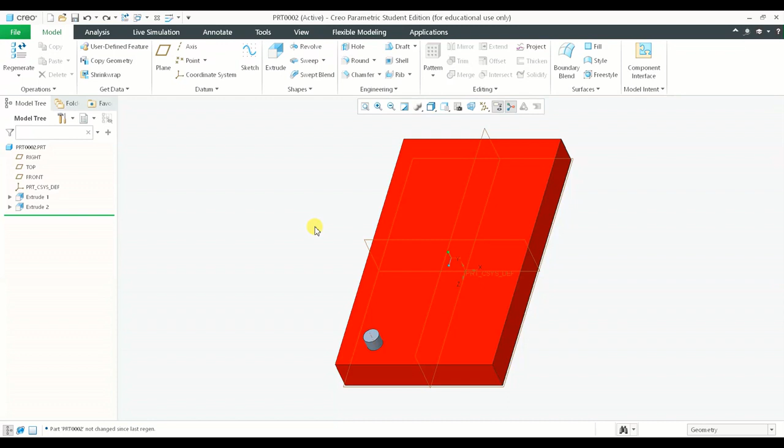In order to explain the next type of pattern, called fill pattern, I have created a rectangular block on which I have created a circular extruded component which I will be utilizing for patterning. I will be selecting the extruded component, which is extrude number 2, and clicking on the pattern.

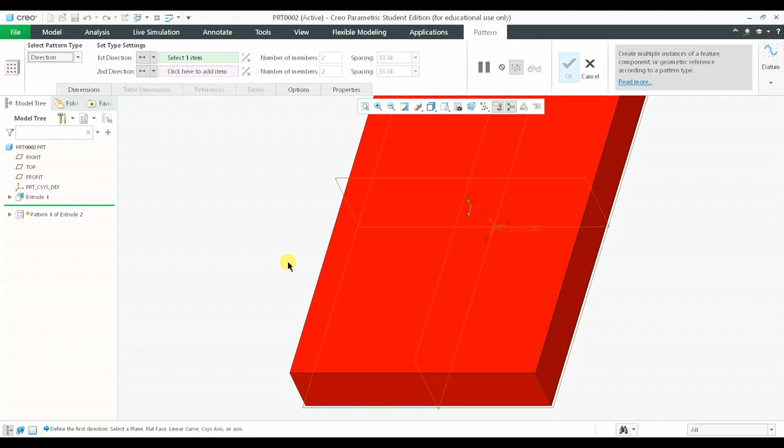After clicking on pattern, I will be changing the type of pattern to fill. For creating a fill pattern, we need to create a sketch after turning on the fill pattern, and you can see that the model we have created has disappeared. It was present earlier, and when changing to fill, it gets disappeared, so please don't worry about it. We have to create a sketch right now.

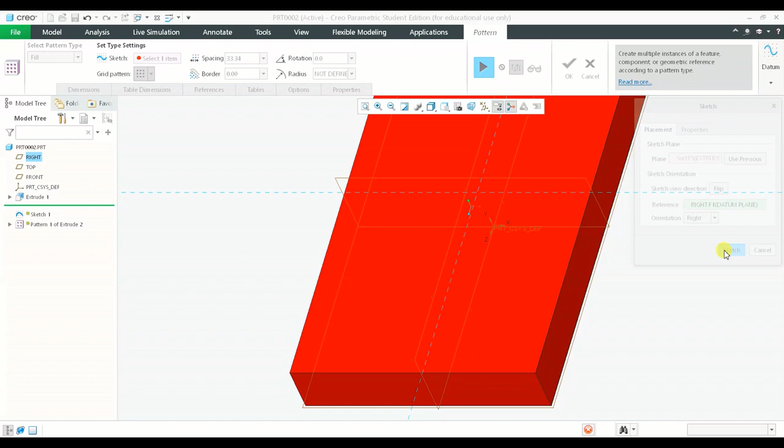So for creating a sketch, you can go to the right hand side and find a datum option. Select the sketch, select the surface, press sketch, align the view. I will be creating a sketch - it can be of any shape. I'll just create a rectangle itself up to the half. I'll press OK right now. I have the sketch on the geometry.

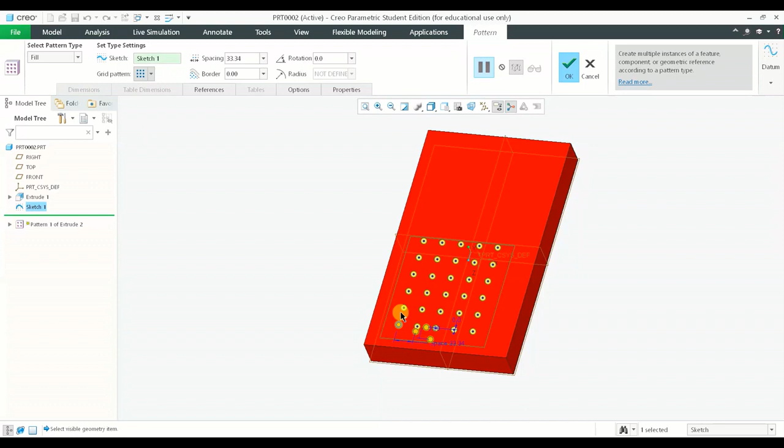I'll just resume it, and you can see after resuming the pattern, the total area of the sketch I've created is getting filled with dots. The dots are nothing but the patterned feature which will be visible on the screen after pressing OK. So here are the total extruded components which are patterned, or which are getting filled, basically in the sketch we have created.

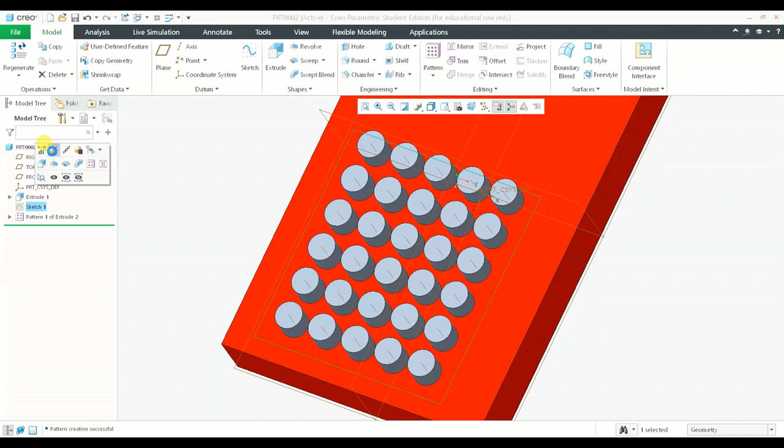The sketch can be of any shape. It is really not required for you to have a rectangle - you can use a spline as well. So I'll just cancel it, delete the pattern, and delete the sketch I've created. I'll select the extruded feature.

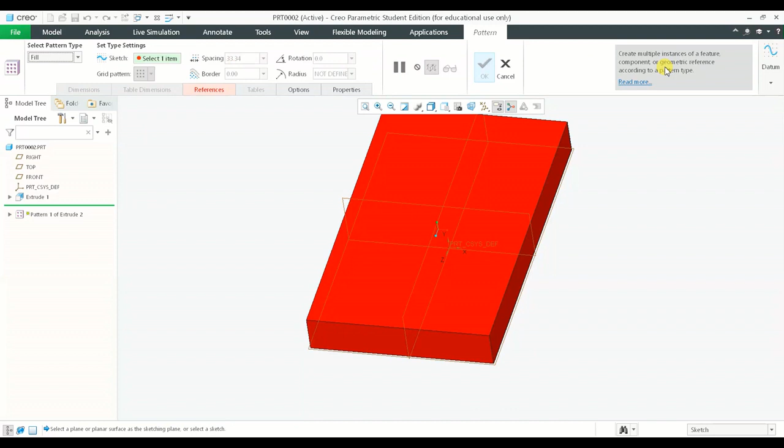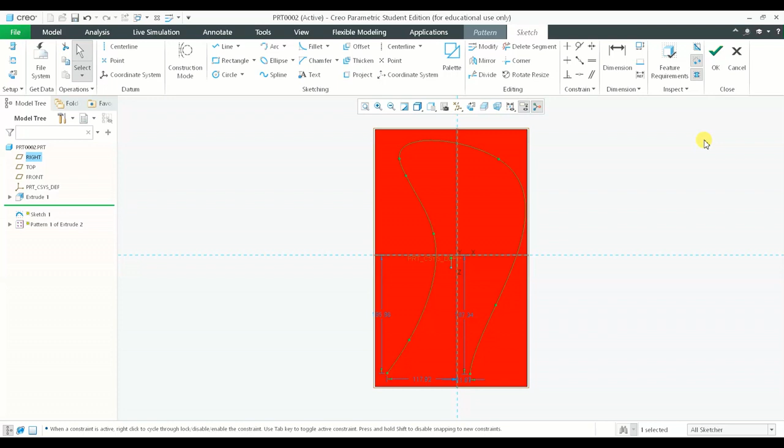I'll go to pattern again, fill, datum, sketch, select the surface, sketch again, align the view. So let me just try to use a spline. Right now let me just keep it as an open section - I'm not closing it as well. Let me see what is going to happen, whether the software will assume it as a closed loop and fill the area under the line, or will it give me an error.

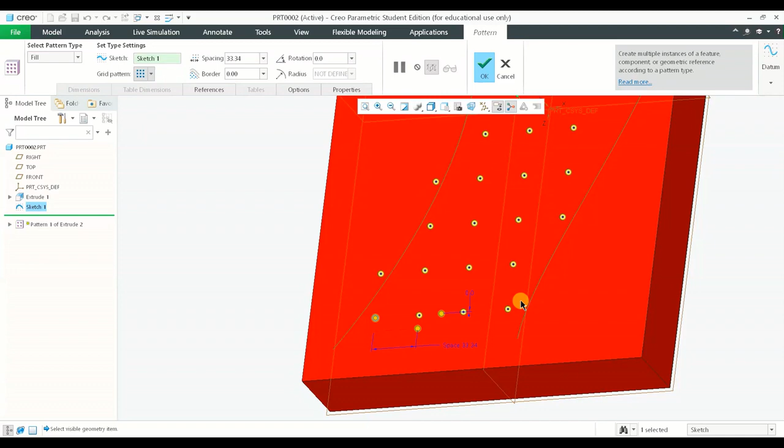I'll just press OK. I'll resume it, and you can see the region is automatically filled with the patterned dots. So what's happening is the software automatically assumes - the algorithm is written in a way that it treats this particular feature as a closed loop and fills the area under the section.

So I'll just press OK right now, and you can see that according to the area, the sketched region is getting filled. So there are certain features over here which we can alter.

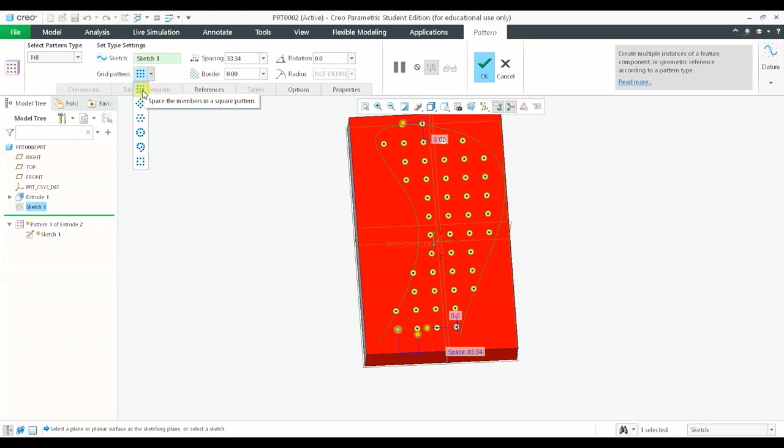We can alter the grid pattern. Presently this is the first type of pattern, and we can just change it from square to a diamond pattern. This is more clearly visible when we are having a rectangular type of sketch. So I'll just pause and change it quickly.

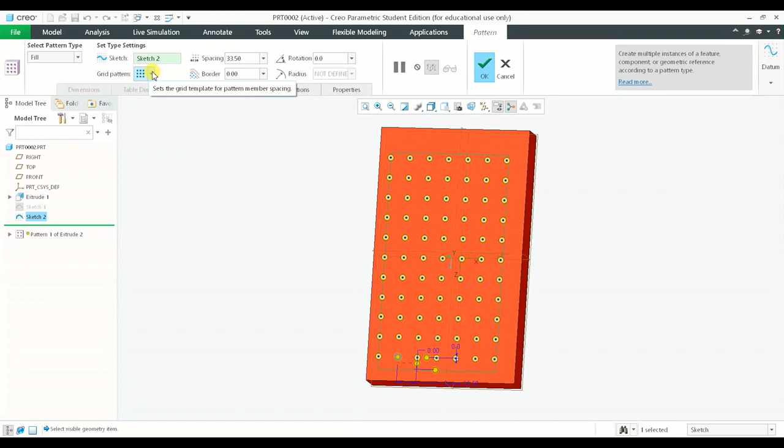So I have created a rectangular sketch, and on that I'm getting filled with the patterned geometry, right? I'll just change the type of grid from square to diamond type, and you can see the arrangement of the features. And the next type of arrangement...

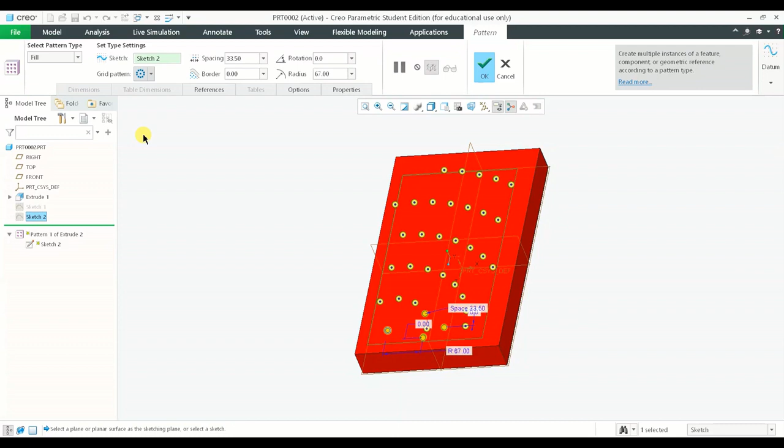Circular, I believe... hexagon, I'm sorry, and hexagon. Then we have the circular type. You can see we can also alter the spacing between them.

So for spacing, I'll just go back to the default, and we can increase the spacing between them. If we are increasing the spacing, the number of features are getting reduced, and if we are reducing the spacing, the number of features are getting increased.

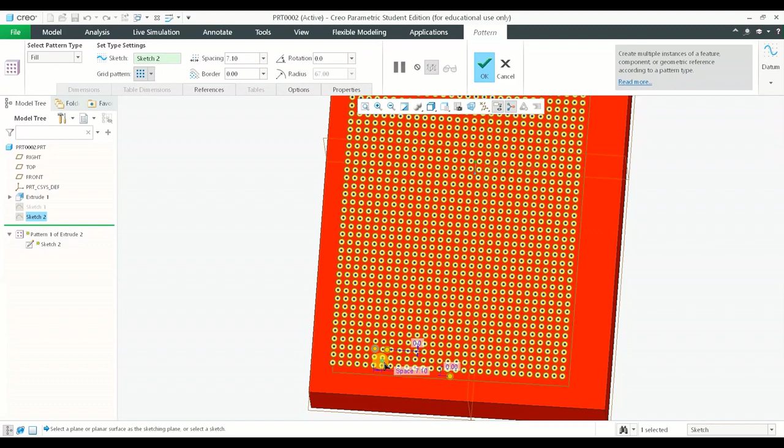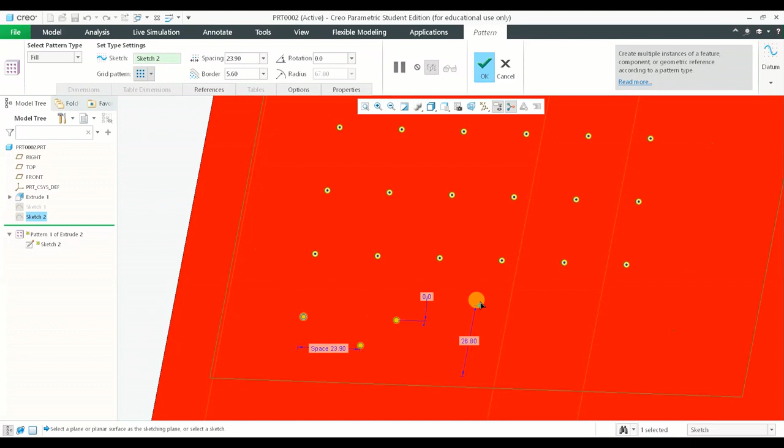So this is another type of option available over here. Presently you can observe that the distance from border is maintained to 0, right? We can also alter that distance - you can see when I'm increasing the border distance, the distance from the sketch is getting increased. I mean, they're just getting more closer and closer to each other.

So I'll just come back to 0. We can rotate - I'll just add a small rotation. We can alter the rotation as well to whatever angle we are wanting it to be. Press OK.

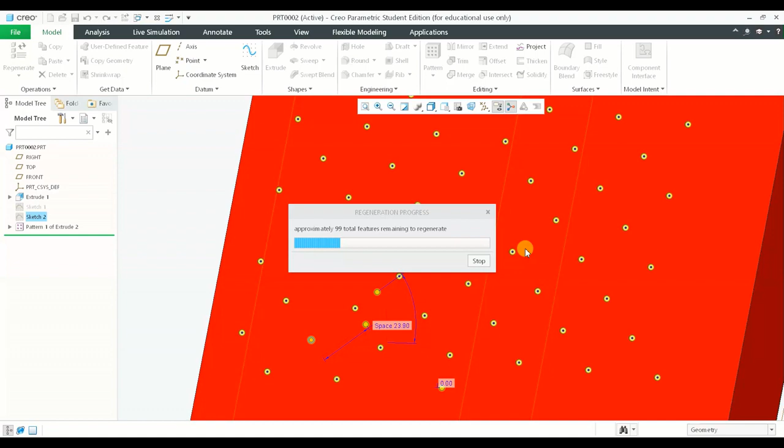So all this particular area is getting filled with the features. I'm just mentioning a point over here that I have never used fill pattern in my career so far. I mean, it is required, but the applications which I'm working on, for me, it was not useful. But as a training in the course, it is my duty to explain you all the types of patterns.

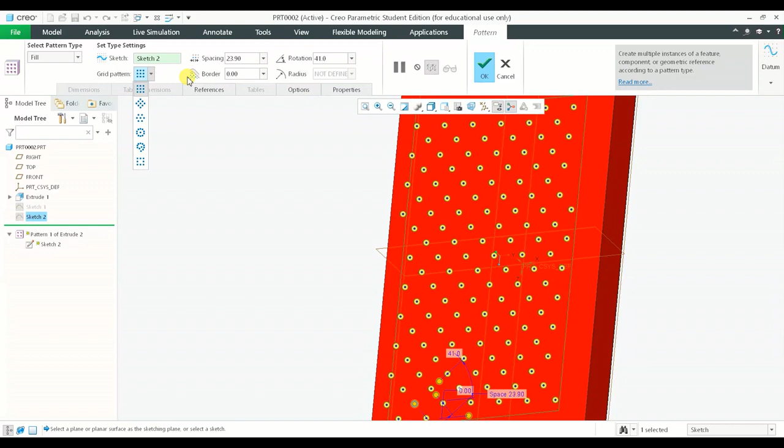So next design is this particular thing. I'll just reduce the spacing. I'll just go to default first. Spacing - I'll just change the rotation to 0 and increase the spacing to 50 to make it more clearer.

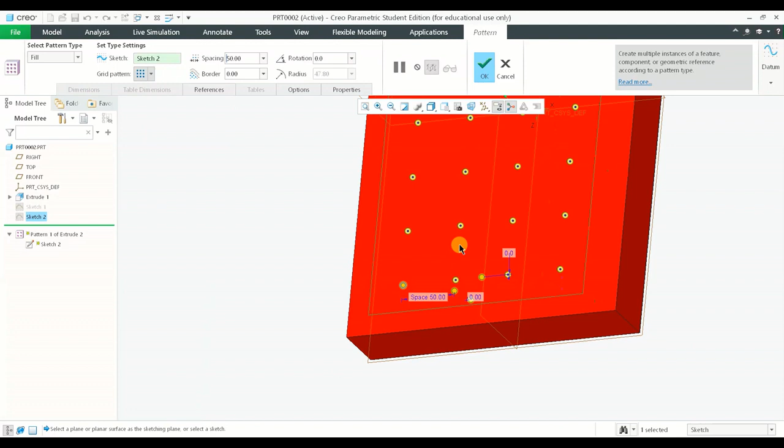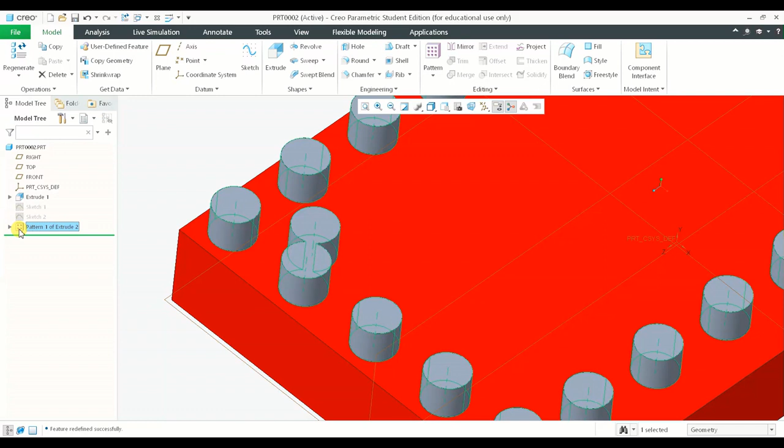Next one is the members along the spiral. We have the last one, which is on the corner of the curve. I'll just press OK - you'll be having all the features along the curve. So this particular geometry is the parent feature. If you're not wanting it, we can just turn it off by selecting it, and you'll not be having that particular thing visible.

So this is all about the fill pattern. Let us practice a simple exercise and move on to discuss the next features.